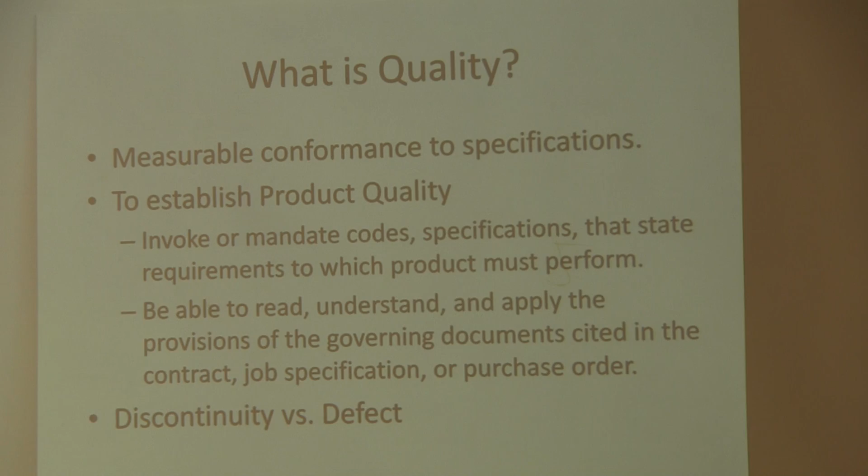Another thing that comes up a lot in welding quality is the difference between a discontinuity and a defect. You might say, well, those sound like the same thing. That's what most people think. But in terms of welding quality, a discontinuity is anything that interrupts the general flow or the uniformity of an object. A defect is a discontinuity, but it doesn't meet the specifications, or it doesn't meet the codes, the provisions of those codes.

For example, later on we're going to talk about some of the specific discontinuities and defects that we might find in welds. One of them is porosity. If you have a single small pore in a weld, it's a discontinuity, but generally, if it's small enough, it's not a defect. It doesn't violate the code, because the code will allow you to have a certain number of pores in a certain length of weld and a certain size. So it becomes a defect when it violates those provisions of the code, those certain numbers and those certain sizes.

So just wanted to say a few words about the different documents that would be used. A code is a body of laws that's arranged systematically for easy reference and use. Easy being put in quotation marks, because sometimes the codes are somewhat complicated. But because a code has legal status, it's by definition mandatory. An example of a code is the structural welding code you've probably heard of in this class. It gives the legal rules.

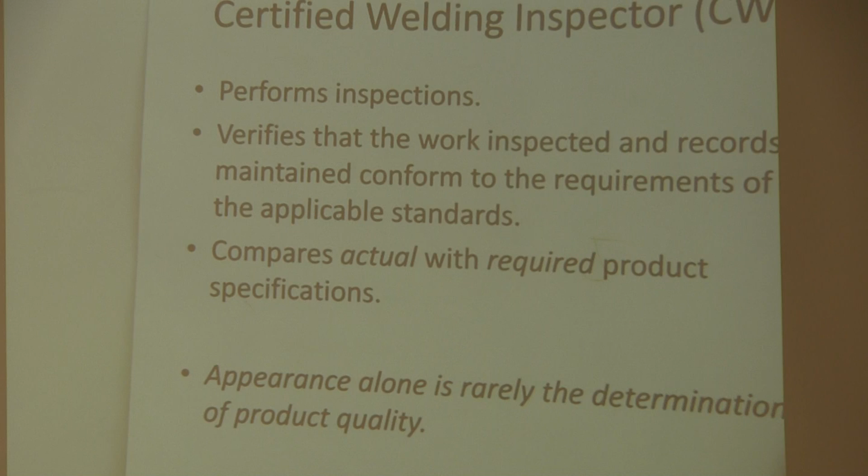So what's required to be a CWI? You can't just decide that you're going to be the CWI for your company. There are education and experience requirements, and all of this is spelled out in great detail on the AWS website, aws.org. For any of you here, because anyone with an associate's degree or higher, you're still required to have 3 years of on-the-job experience.

They've got other levels. If you're only a high school graduate, you have to have 5 years experience. If you made it through 8th grade, you have to have 9 years experience. If you made it through less than 8th grade, you have to have 12 years experience before you can apply to become a CWI.

Once you fill out the paperwork, put in your application, and send AWS your money, there's three 2-hour sections—basically an all-day exam divided into three parts. The first is a fundamentals section, which talks a lot about the different welding processes and the non-destructive techniques for testing those welds. The next is a practical application section, using techniques we'll talk about later.

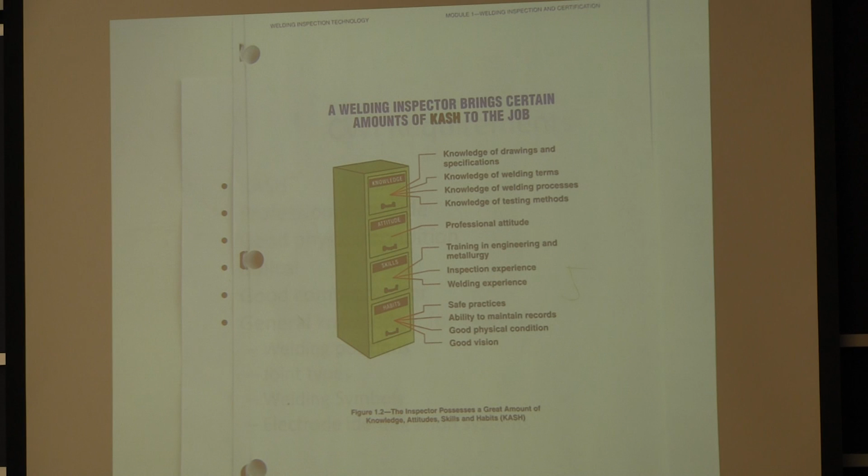It's important to have a professional attitude. You're dealing with a wide variety of people. You're dealing with the actual people making the welds, the welders. You're dealing with supervisors, schedulers, and a lot of different people trying to ensure that the quality is high. Depending on the interest of that person you're dealing with, they may or may not feel as strongly about it. So it's important that you have a professional attitude and that you work well with these people.

It's important that you have good physical condition. Sometimes you're climbing around a crane or a bridge or a pressure vessel. Sometimes you're down on your knees. Sometimes you're climbing over things. So it's important that you're in fairly good physical condition.

It's important that you're ethical. If you're not willing to stand up for what you know is right, if you're not willing to make sure that those codes are followed, then you're not going to be a very good welding inspector.

You need to be a good communicator. You need to be able to communicate with those various people and explain things so that they can understand them. If you find a defect in the weld that needs to be repaired, you need to be able to communicate that to the welders so that they know what it is that they need to repair.

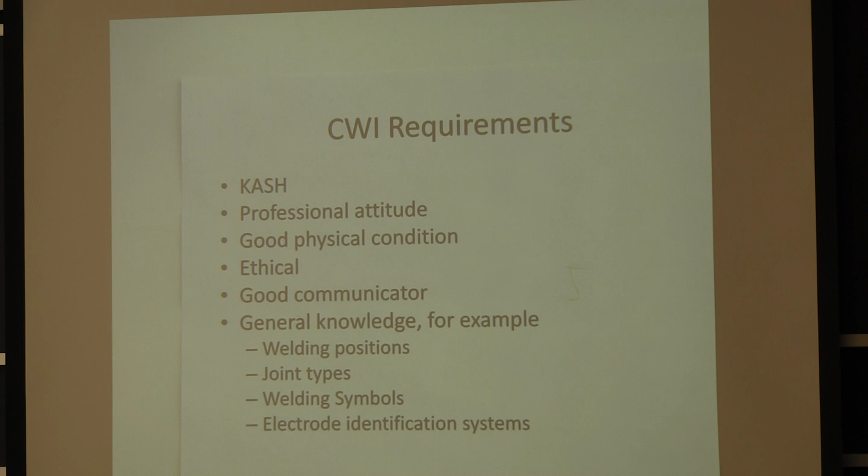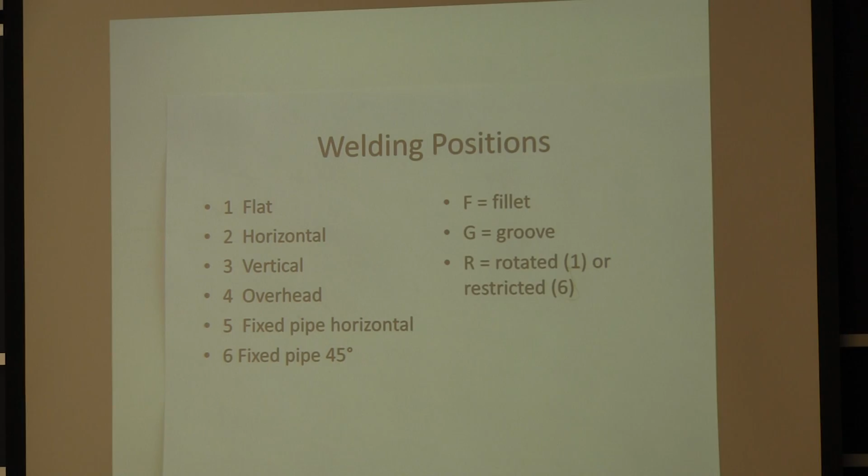So first off, with welding positions, I'll show you some sketches of some of these. But first off, you have a couple of different kinds of welds that can be made. One is a fillet weld, which is a weld between two 90-degree pieces of structure or pieces of metal. If you've got a piece of metal here and a piece of metal here, you're going to put a weld right there. That's a fillet weld.

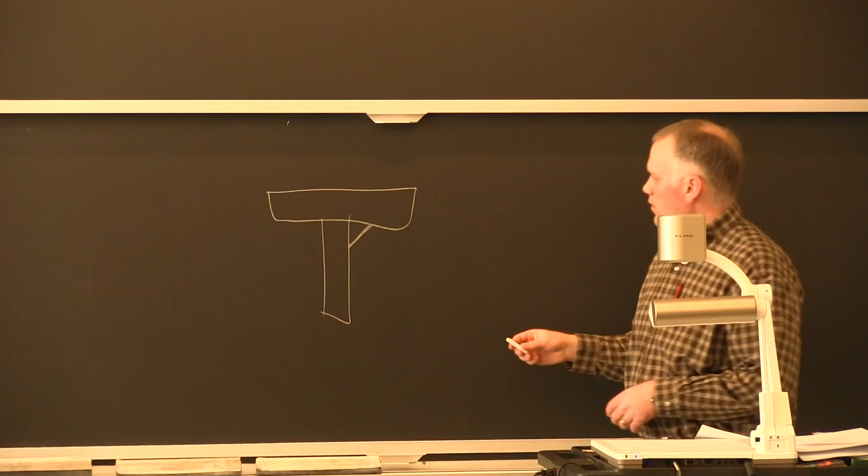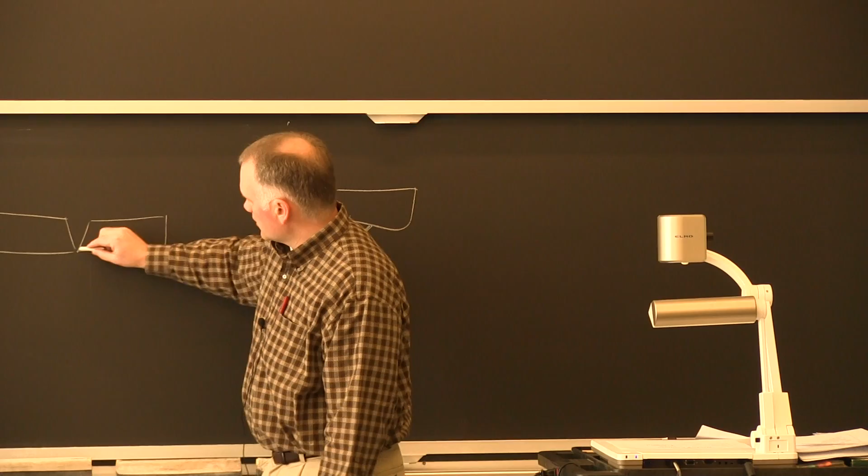The second type of weld is a groove weld, where if you've got, looking at a cross section, a couple of pieces of metal that you want to weld together, you're going to put a weld in here. That's a groove weld because you're filling up the groove.

And so that can be done in a variety of positions. It can be done in the flat position. This is the flat position. If you're welding from up here, it's flat. You're welding straight down. That's the easiest, so that's designated as a 1.

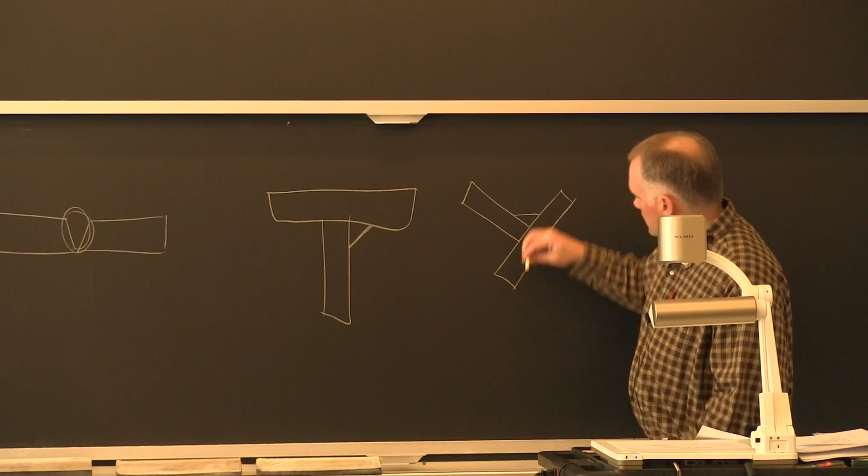And so if you have a 1F fillet weld, then that would actually look something like this. You're welding here. That's 1F.

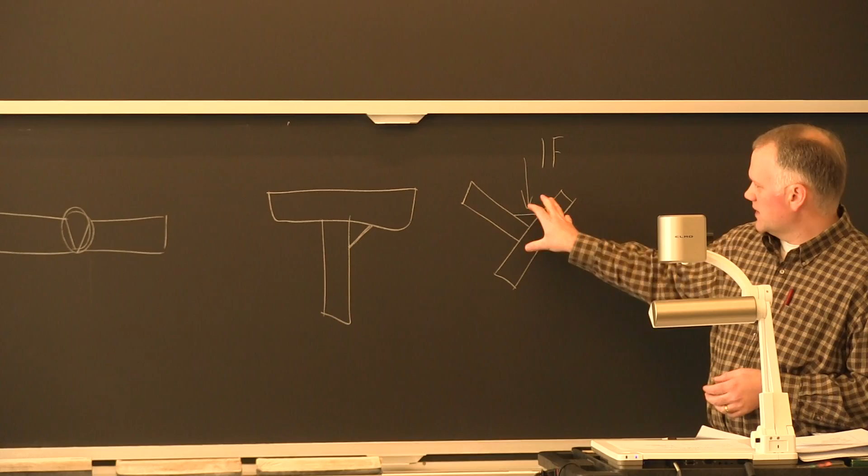2F is horizontal. So if you just tilted this a little bit, then that's a 2F fillet weld. Or if you put this up on its side and you're welding along like that, that's a 2G.

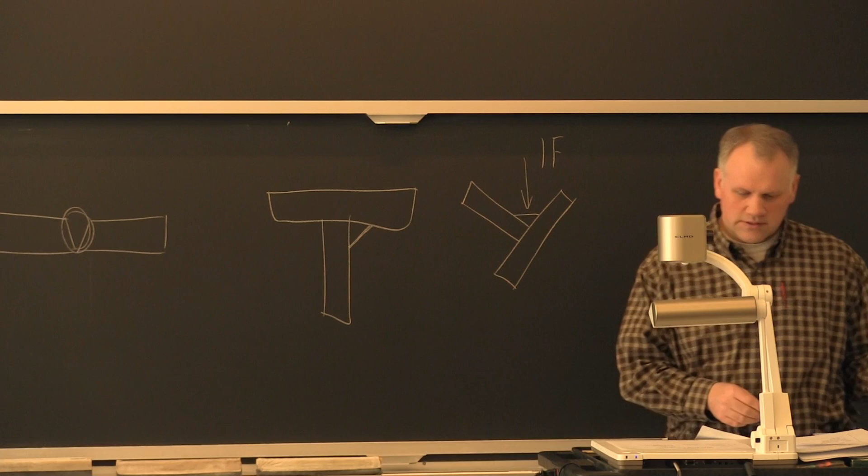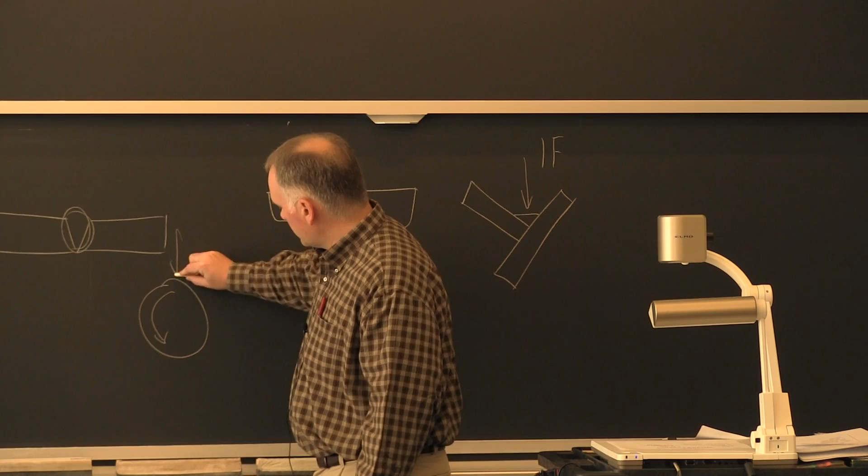The other positions you could have are vertical, overhead, and then when you're welding pipe, you can actually rotate that pipe. So if you're welding on a pipe and rotating it, welding from up here, then it's actually in the flat position. You're just rotating the pipe underneath. So you might have a 1GR, which means it's rotated.

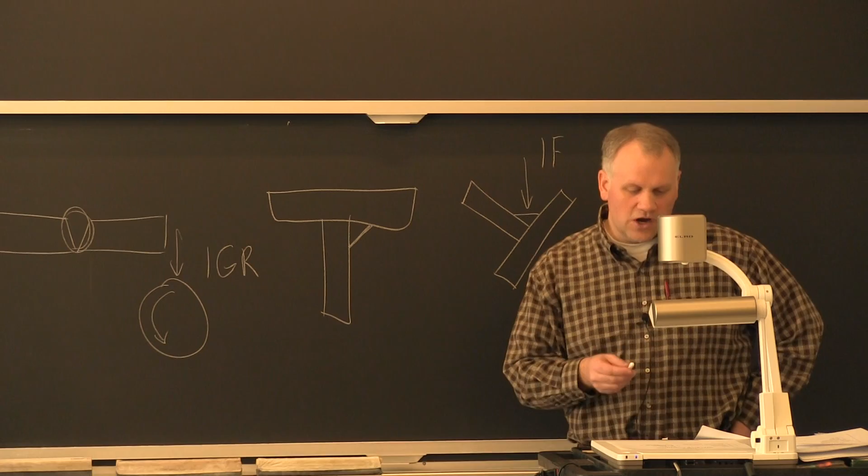You might also have a fixed pipe, and that's what 5 is, 5 and 6. If it's in the horizontal position and it's fixed, it's a 5. If it's in a 45-degree position and it's fixed, then it's a 6. And if you have the R with the 6, that means it's restricted.

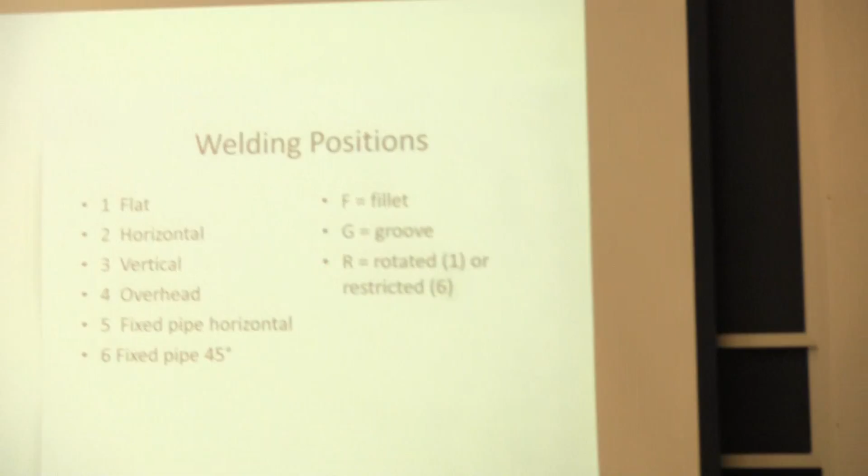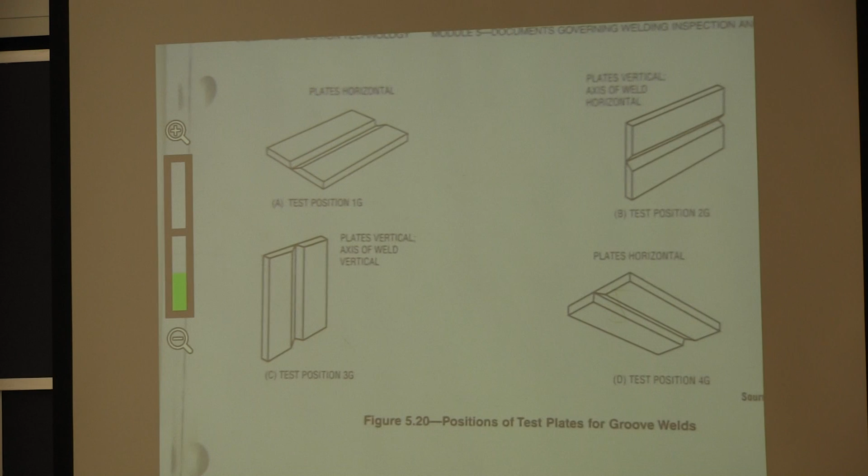I'll just show you a picture of that rather than try to draw it. Try and blow these up a little bit. So this first set right here, like I mentioned, if the plates are horizontal and you're welding from the top, that's a 1G groove weld there.

2G, your weld is actually horizontal, your plates are vertical. The 3 position, which I mentioned was vertical, is like this - your plates are vertical and your weld is vertical. And then overhead is when it's upside down and you're welding overhead.

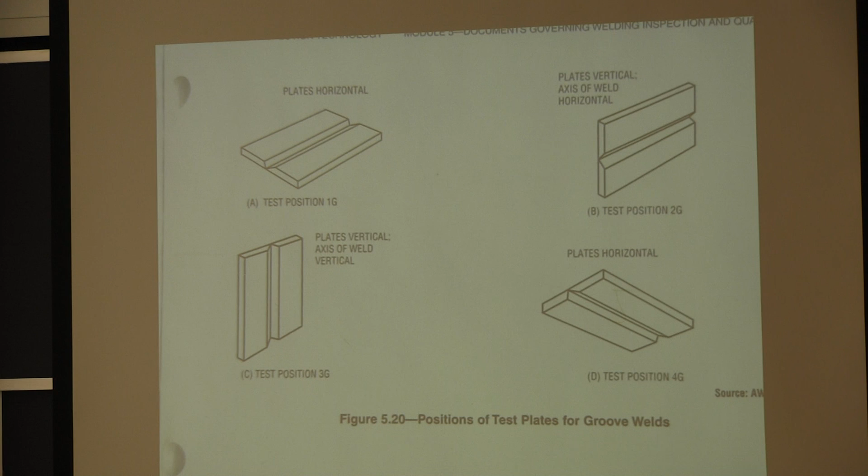This is the same type of thing for fillet welds rather than groove welds. This is what I drew right here - this is a 1F fillet weld. This is a horizontal fillet weld, or a 2F. This is vertical, you're welding up or down.

That's something that might be called out in your weld procedure, is whether you're making a vertical weld in the up position or down position. And then overhead, once again, is up above.

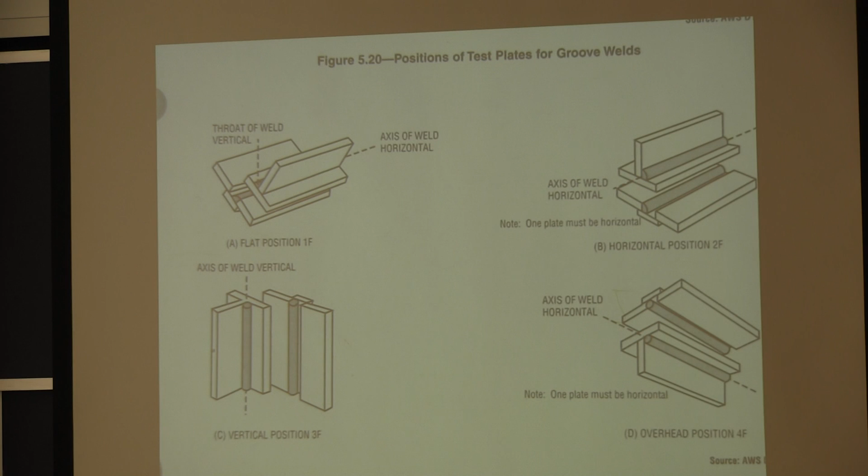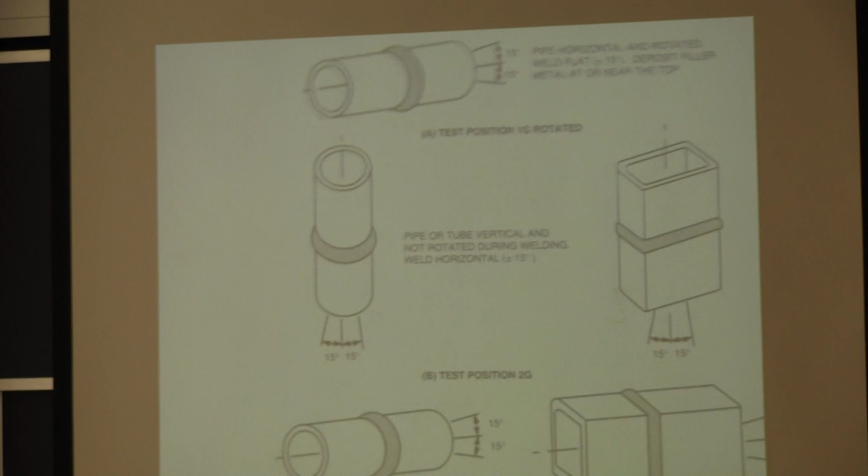And just to show you a couple on the pipe - this right here is a 1G because the pipe's being rotated, as opposed to this down here which actually looks the same, but it's a 5G because the pipe is fixed rather than being rotated.

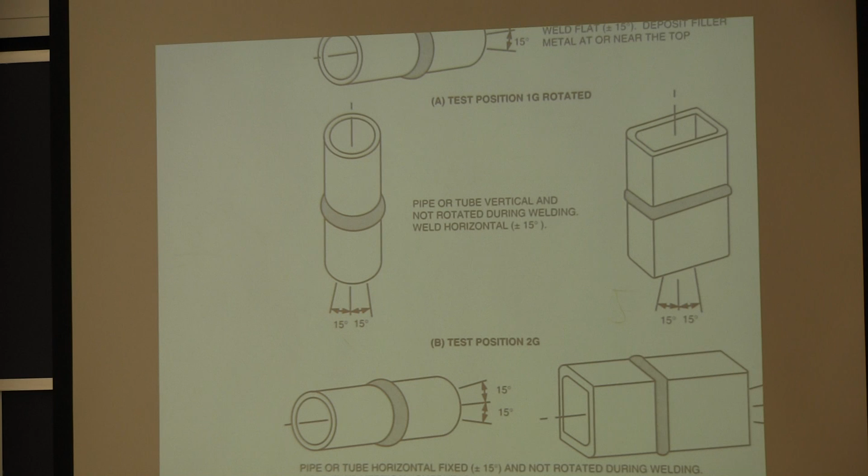This would be 2G - the pipe is vertical and the weld would be horizontal. I talked about the restricted on the 6 position. This would be a regular 6G pipe weld. This would be a 6GR because you've got something in there that's restricting your access. You may have a flange or something around that pipe.

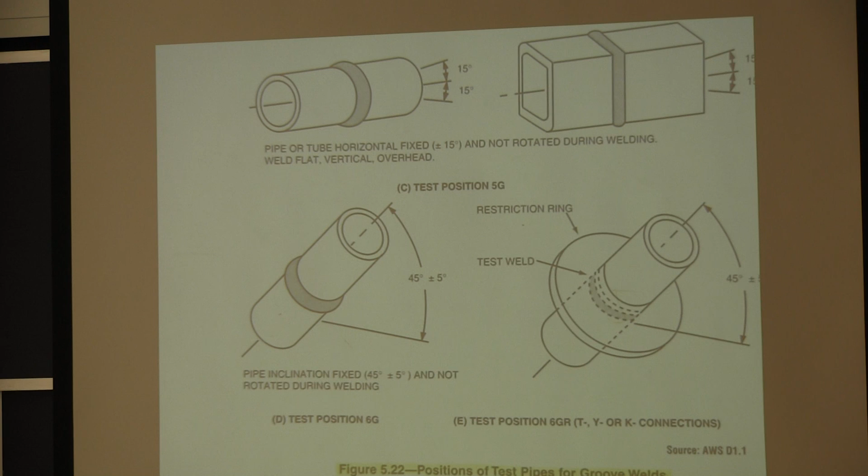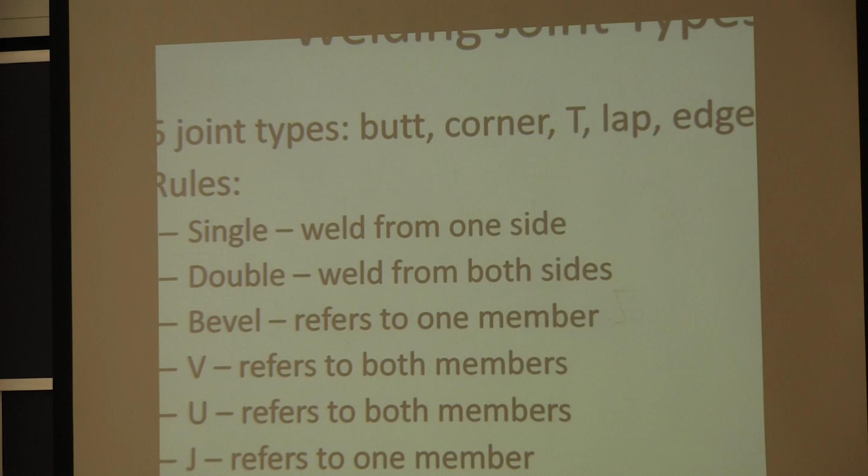The next topic I wanted to cover was welding joint types. There are five main joint types that we would make in welds: butt, corner, T, lap, and edge. I'll show you pictures of those in just a minute. There's some rules that go along with those.

You might hear of a single bevel butt joint, for example. And what that means is, where I drew this here, this would have actually been a double bevel because both of the plates were beveled. A single bevel just means that only one of the plates is beveled.

So double means both, or welded from both sides. Bevel refers to one of the members, so you can single bevel that or double bevel it. Actually, I think I said this wrong. This would be a single bevel weld because it would all be welded from this side.

You can also have a double bevel, and what that means is that your piece looks like this because it's then welded from both sides.

Another type of edge preparation that we sometimes have is a J groove, which looks kind of like a J. So you can have a single J, or you can have a double J, which becomes a U groove.

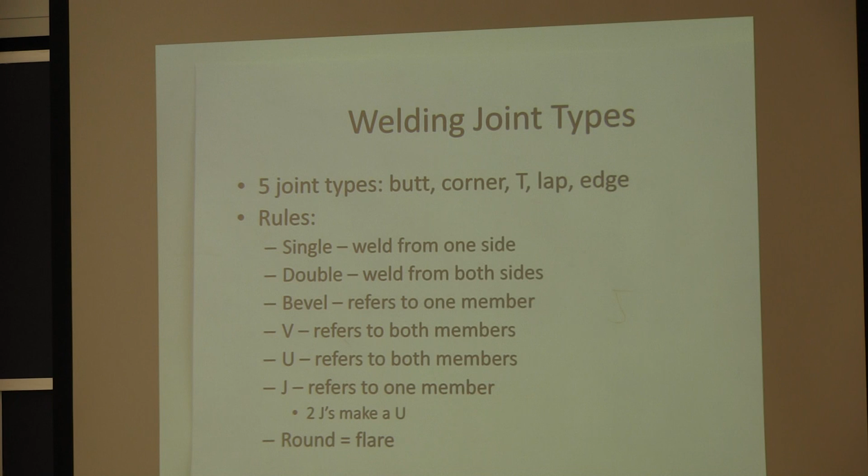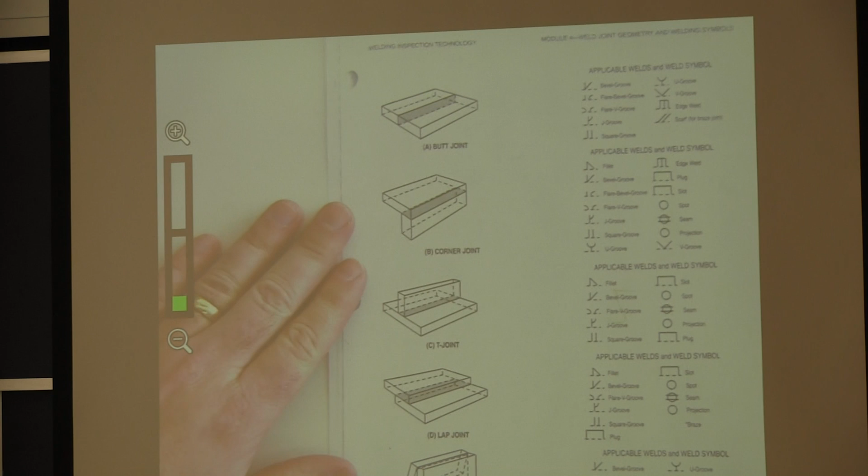Here's an illustration of the various types of joints. A butt joint, you're butting two things together just like it sounds. A corner joint is just like it sounds as well, making a weld on a corner of two plates or components. A T-joint is just like it sounds, the parts are actually making a T. A lap joint, the parts are overlapping, and you'd weld that with a couple of fillet welds, or at least one. Then an edge joint is where you've got two pieces on edge and you're welding along the edge of those.

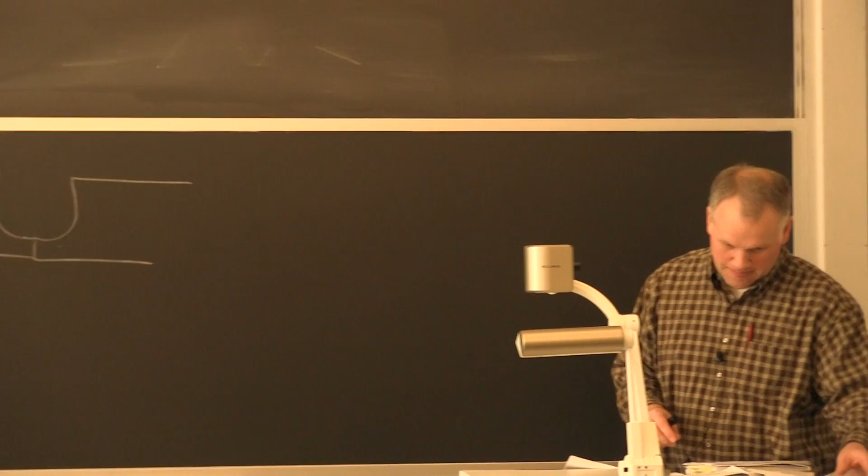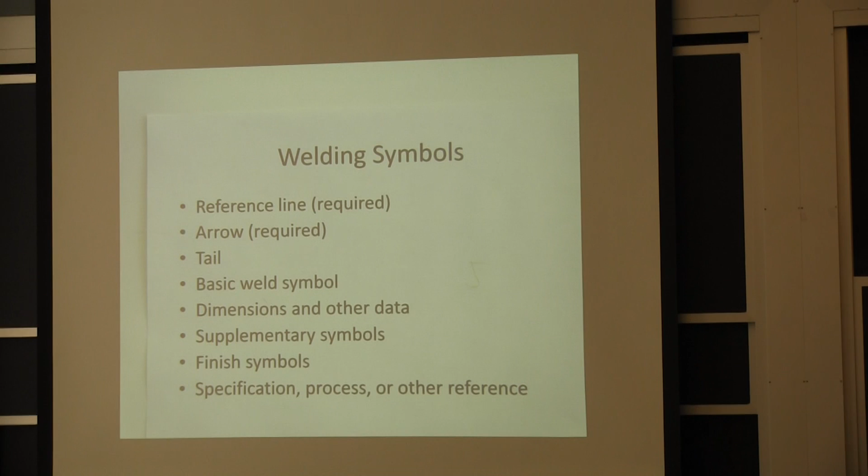Okay, the next thing is an inspector needs to understand what the welding symbols mean. There's various parts of a welding symbol. I'm going to put some pictures up here and we'll talk about those parts.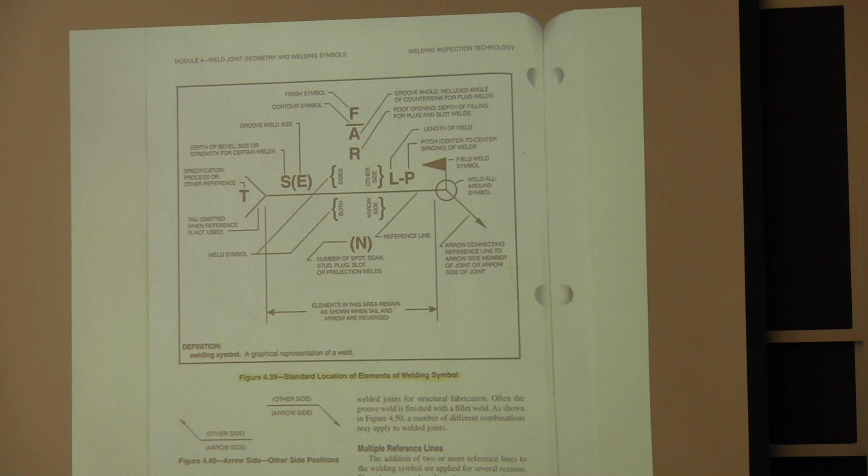This is a welding symbol, or kind of a map for making a welding symbol. The reference line is this line right here, that's kind of where the information is centered, it's put upon that line. Notice it says that information would remain the same whether the arrow and the tail were switched sides. That reference information would all remain right there. The arrow is required, and the arrow points to where the weld is supposed to go. Then there's information on the reference line.

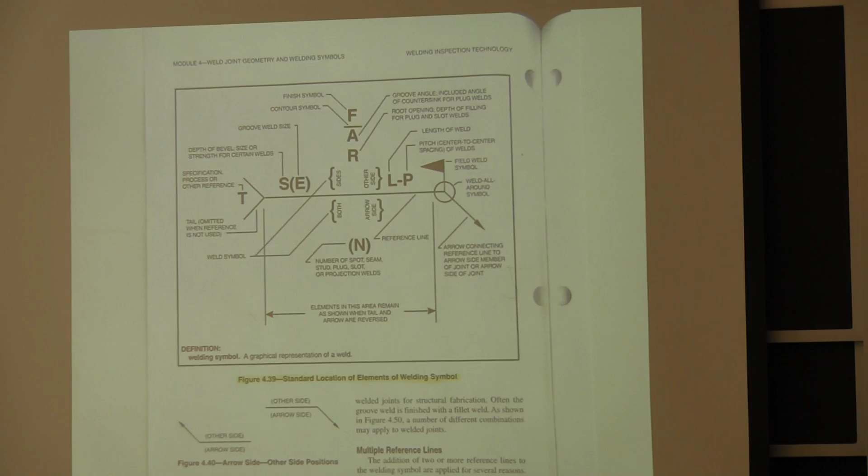Above the reference line is called the other side. So if I was making a weld right here and wanted to fill this up with weld metal, and I put my weld symbol down here, and I wanted to put my information for that weld, I would put it on top of the line because that's the other side, so it's being made on the other side. If I wanted to put a back weld down here, I'd put the information down here. That's the arrow side.

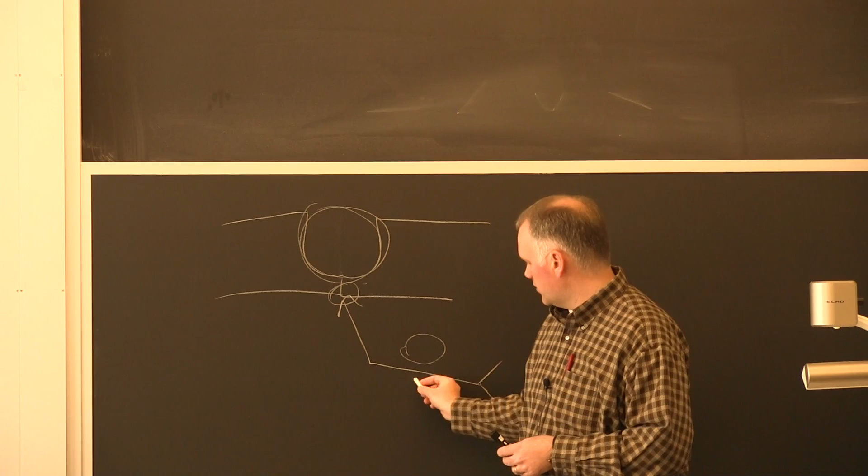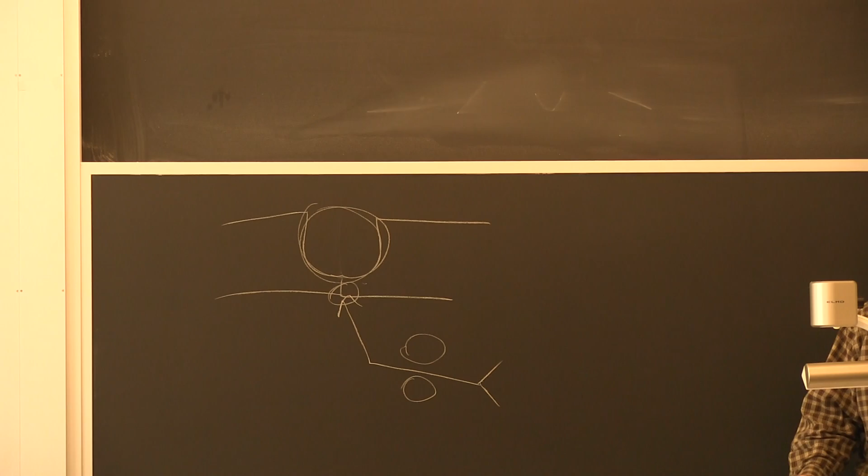Question: is this stuff that you use in a drawing at all? Is this a typical notation that you use in a drawing? Yeah, this is the stuff that goes on the drawings.

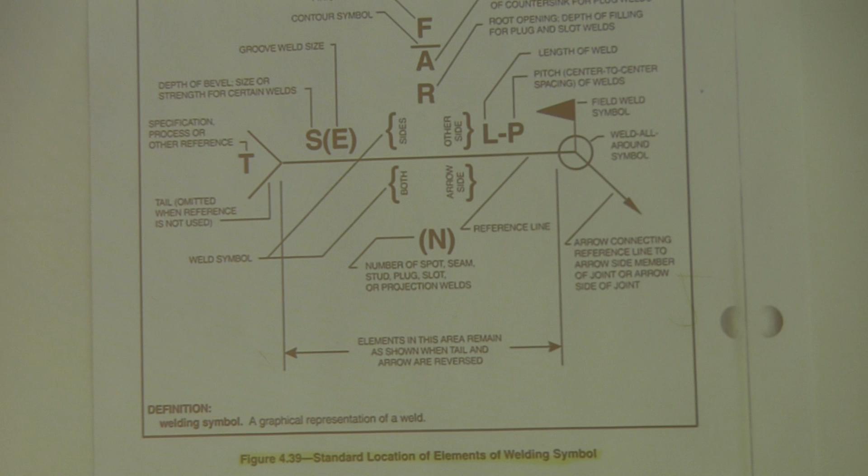So the next thing on the list is the tail. In the tail, you place specifics on the process. There's not always something in the tail - in fact, sometimes they leave the tail off if there's no information that needs to be put in there. But if you want to specify the process you weld with or something like that, you put it in the tail.

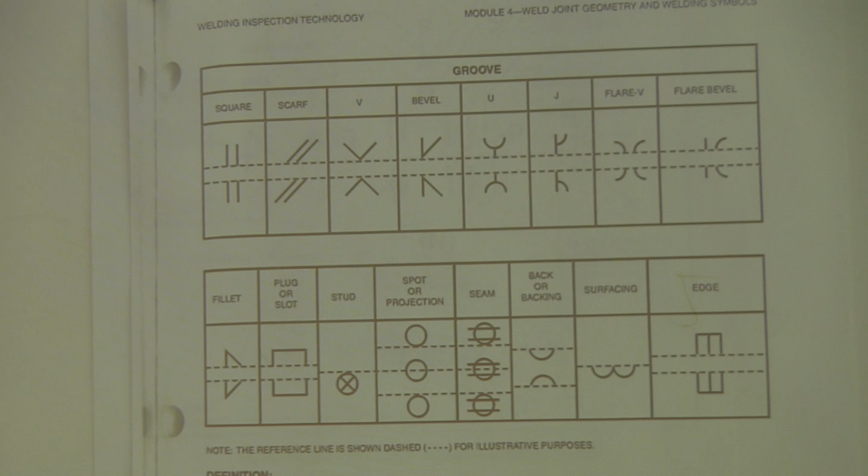The basic weld symbol is shown here - these are actually the basic weld symbols. One thing to point out: there's a difference between a weld symbol and a welding symbol. The weld symbol are these symbols here, which are a part of the welding symbol. The welding symbol is the whole symbol. These are the type of weld that goes in that joint - if you're making a V groove joint, you put the V on there. Another very common one is this fillet symbol, if you're putting a fillet in there you put the little triangle. So there's a variety of different types of welds that can go in these different joints we talked about, and these are the symbols that go above or below the reference line. Those are all in the handbooks and stuff as well.

A lot of times you need to put the size of your weld here or here. If you're making a 1/4 inch weld, that needs to be on your weld symbol. There's all kinds of other supplementary and finish symbols that can be added to a weld symbol, but most weld symbols aren't going to have all of this on there because people don't deem it all important. But if the finish of your weld has to be ground flush or something like that, then you've got to put that up here in your weld symbol.

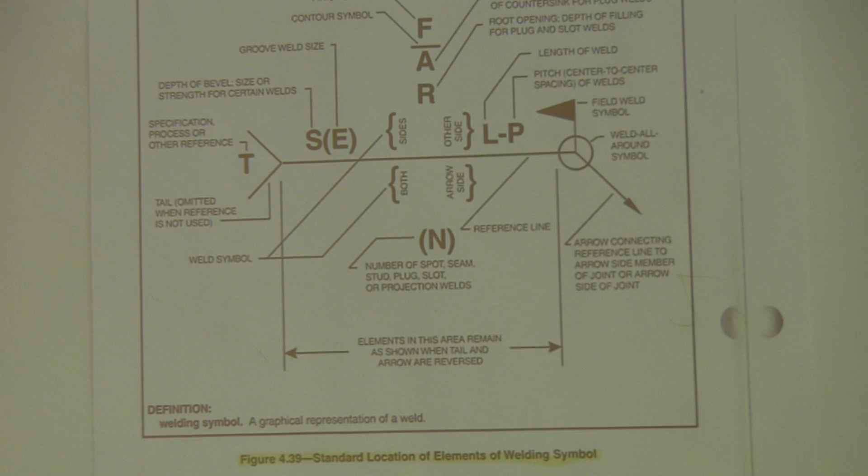Next, I wanted to talk a little bit about electrode identification systems. This is just part of that general knowledge, understanding when a weld procedure says you've got to weld with shielded metal arc welding, which is stick welding, and you've got to use E7018 electrodes, you need to understand what that means.

Shielded metal arc welding, like I said, is stick welding, and those electrodes always start with an E, then the following two digits, if they're 70 or 60, or they can be 110 or something like that - that's the tensile strength required of that filler material. The third digit is a position, so a 7018 can actually be used in all positions. One refers to all positions in these systems. And the 8 in a 7018 refers to the fact that it's a low hydrogen electrode. So the last digit is a coating or operating characteristics identifier.

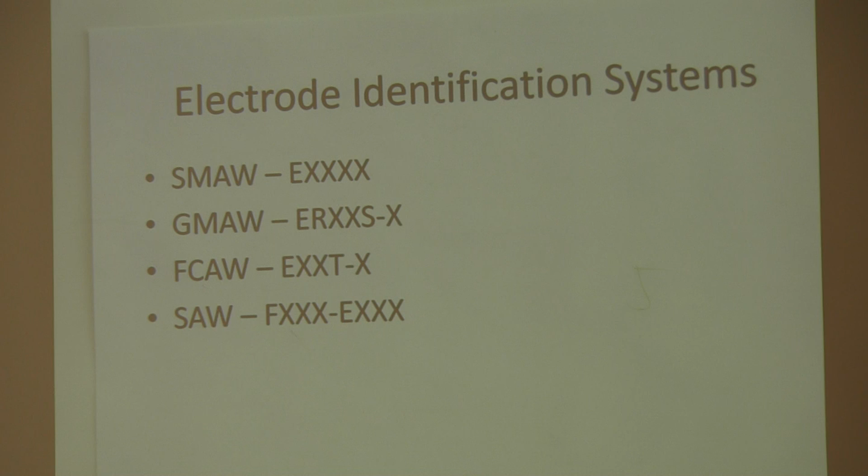For flux cored arc welding - do they know the weld processes? Not from this course. In other modules, I go through it, but they don't know from this course.

Flux cored arc welding is basically a little tube of material that's got flux on the inside of it, but it's welded much like MIG welding. It's a wire-fed system. So there you've got an electrode - the E stands for electrode. Then you've got a strength digit and a position digit. The T stands for tubular, it's a tubular electrode. And then you've got a chemistry digit as well.

And submerged arc is the last one I've got up there. Submerged arc actually has specification for the flux and the electrode. I don't know if you're familiar with submerged arc welding, but you're actually welding through a big blanket of flux, and so they specify the flux as well. That's why you've got both F and E. You've got a strength and chemistry requirement on the flux, and then you've got chemistry and manganese contents on the electrodes as well. These are all things that are spelled out in various codes and handbooks and stuff as well.

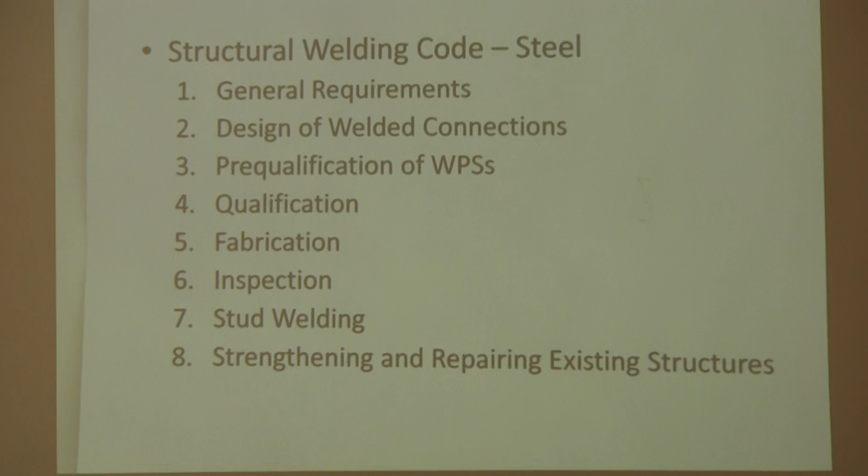Not going to spend a lot of time on this - these are just the various sections in the AWS D1.1 code. It's divided into 8 sections. Unless you're doing something specific like stud welding or fixing existing structures, you're mostly going to use the first 6 sections. Really, unless you're involved in design, you may even only just use a few of the sections.

Basically, the design, the second section, is for when the part hasn't been built yet - these are the design things that you need to consider. In AWS D1.1, this is a little bit different than a lot of codes - they actually have pre-qualified processes. So if you've got processes and parameters that have been proven over time, you can just look in there, you can write out your weld procedure, and you don't have to actually do the qualification testing because it comes out of the code. It's been proven over time.

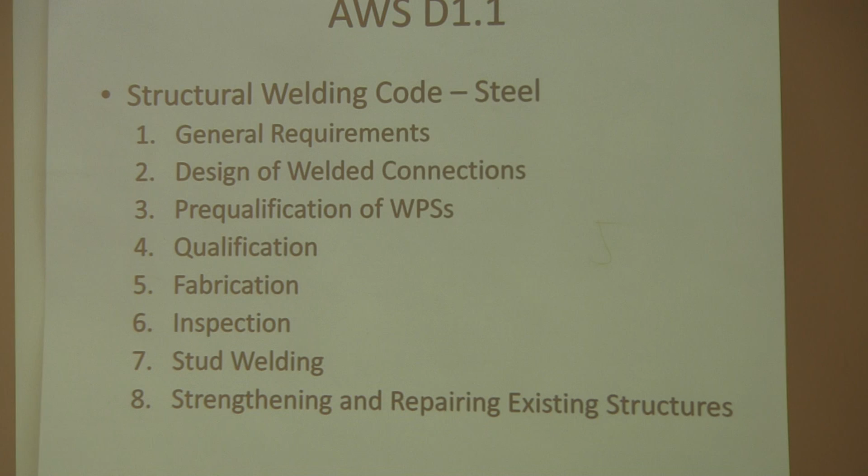If you're welding something where you don't have the ability to do those pre-qualified procedures, then Section 4 tells you everything you need to know to do that qualification. And then fabrication gives you the rules for how to make things, how to weld things. And then inspection has the requirements and the acceptance criteria that we talked about. It gives you everything you wanted to know about porosity and cracks and lack of fusion and whether or not it's acceptable and what the parameters would be.

I think Tom has talked to you a little bit about the qualification of the procedures. I just wanted to throw this up for a few minutes. The weld procedure specification is the document that the welder would use.